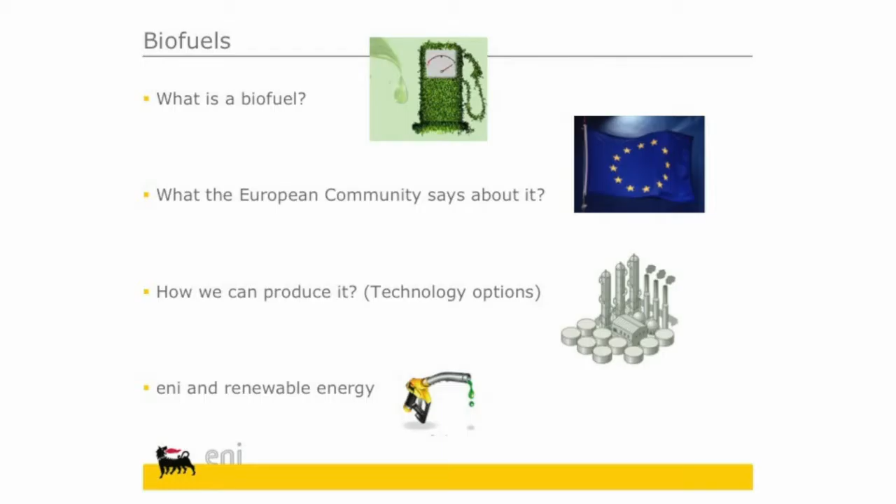Today I want to tell you something about biofuels. During this seminar we'll see what a biofuel is, what the European community says about biofuels, how we can produce them and eni involvement on biofuels. What is a biofuel? A biofuel is a fuel that is derived from biological materials. During this presentation, we will understand which kind of materials.

But first, I want to show something about the carbon balance of biofuels. In particular, all fuels, fossil and bio, emit some carbon dioxide during the combustion phase in the engine. But for biofuels, this CO2, carbon dioxide, is first fixed during the growth of the biomass. So we have a minor impact on CO2 emissions for biofuels compared to fossil fuels.

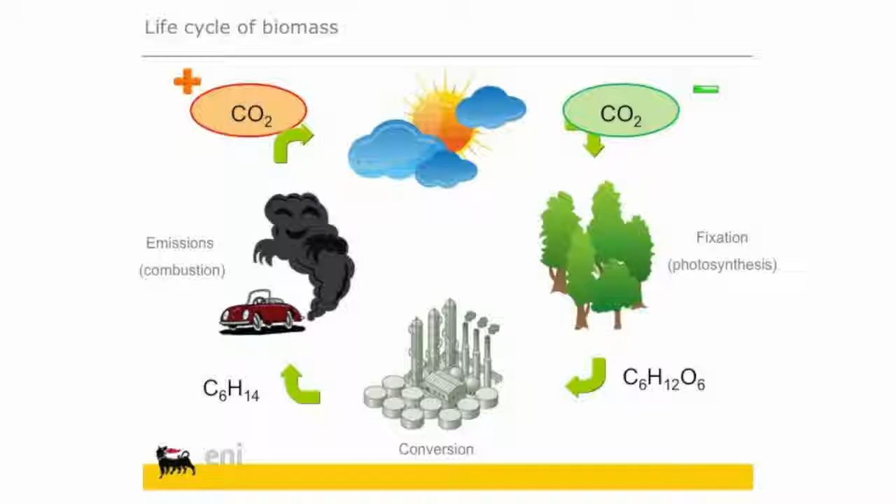What does the European community say about it? In order to reduce CO2 emissions, the European community indicates a quantity for biofuels. In particular, there is a directive, the Renewable Energy Directive, that fixes 10% of energy in the transport sector for 2020 from biofuels and electricity and hydrogen produced from renewables. Moreover, the RED also suggests a percentage of advanced biofuel.

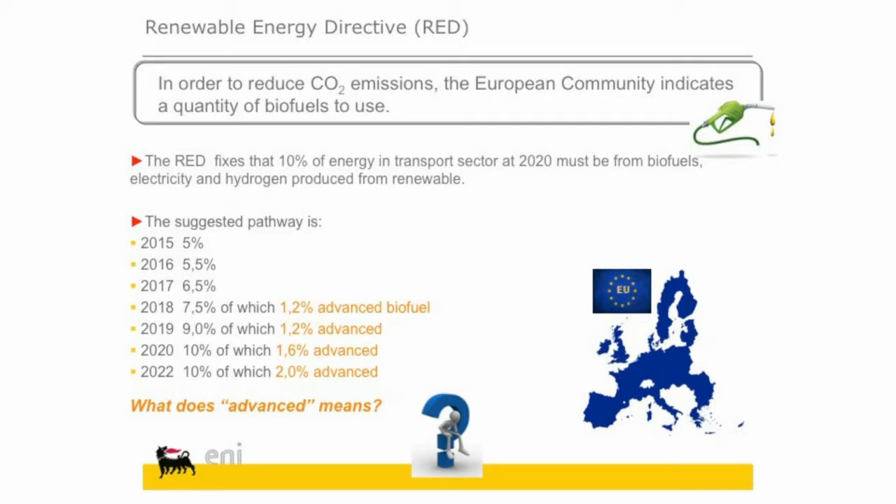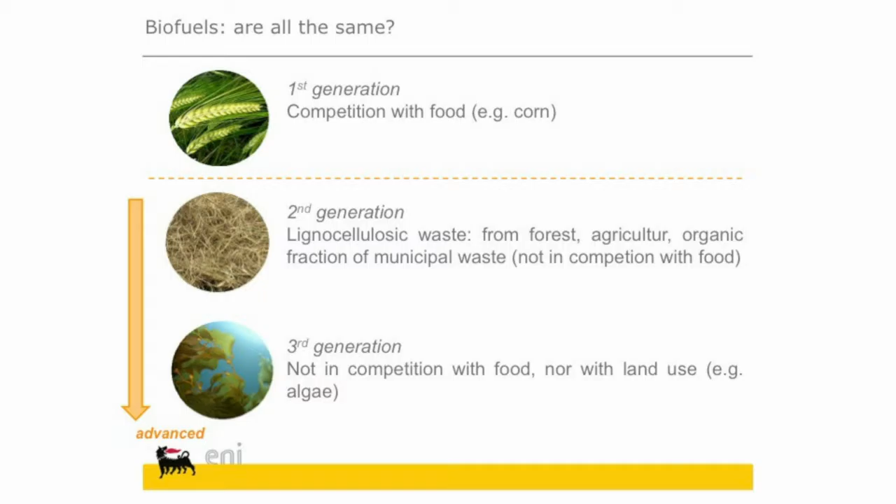What is an advanced biofuel? We can see in the slide. Are biofuels all the same? This is the question, but the answer is no, because we can define three different generations of biofuels. In particular, the first generation, when the biomass for producing biofuel is in competition with food. The second generation is from lignocellulosic biomass, so we have no competition with food. But moreover, the third generation is when there is no competition for food, but also for land use. For example, for algae, we can cultivate algae in the sea or in other areas not suitable for other cultivations.

But first, I want to show you the actual situation of biofuels. We can see the production now of biofuels in the world, and we can also see that they are mostly of first generation, in particular from palm, from rapeseed, from sugarcane, and from corn.

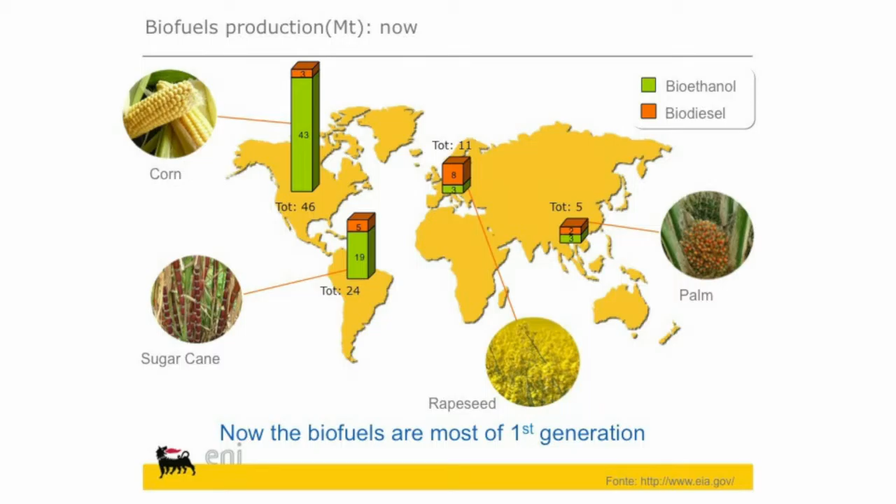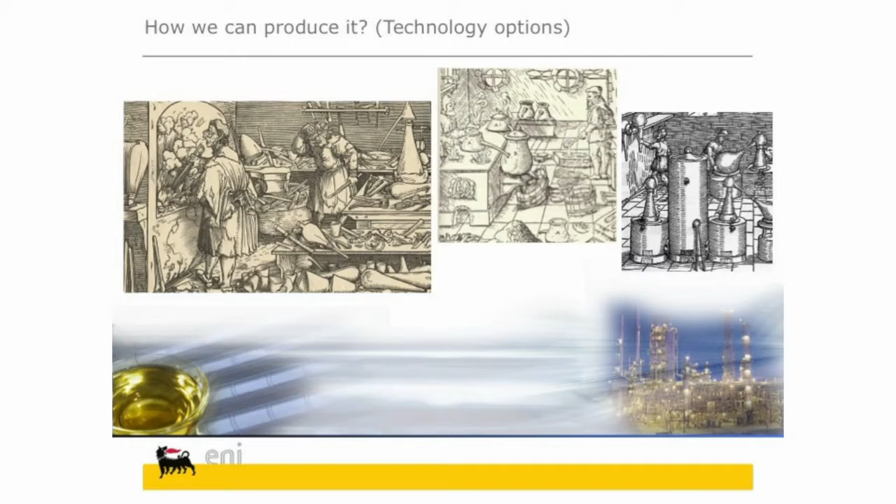Now, we can see how we can produce a biofuel. So we have some different technological options. A big distinction is between biochemical conversion and thermochemical conversion. Under biochemical conversion, we can see fermentation, digestion, and photosynthesis. For thermochemical conversion, we have pyrolysis, liquefaction, gasification, and hydrotreating.

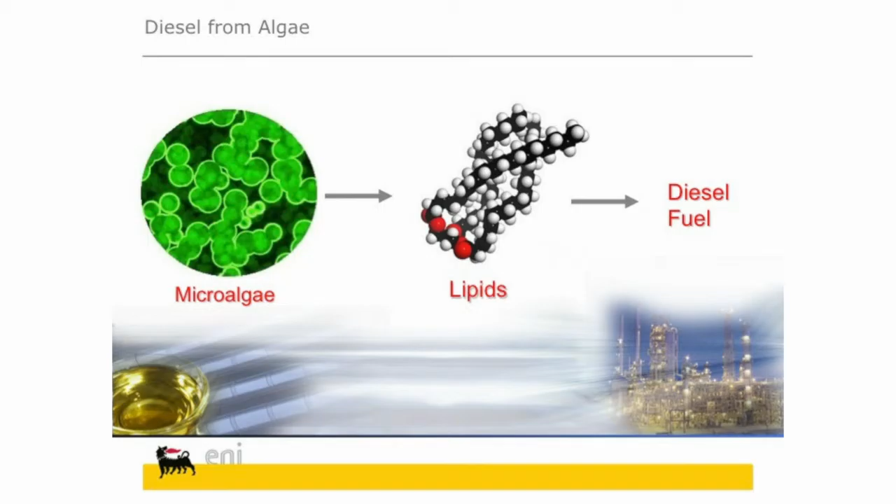Before seeing the way to produce biofuel, we can mention the most famous biofuels. We have bioethanol, biodiesel or FAME, hydrotreated vegetable oil, HVO, biomethane, pyrolysis bio-oil, and biomass to liquid. Now we start from bioethanol. To produce bioethanol, we need sugars, and in general in this presentation you can see the molecules with carbon atoms in gray, hydrogen in white, and oxygen in red. The sugar for bioethanol derives from biomass.

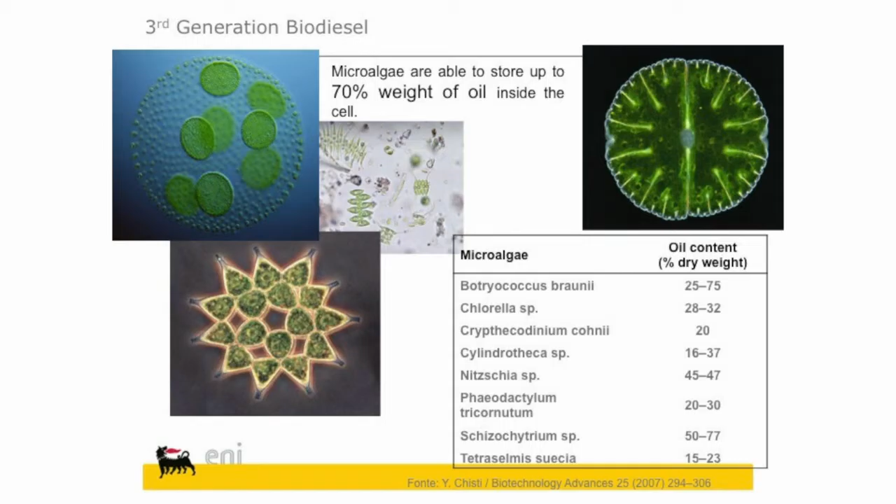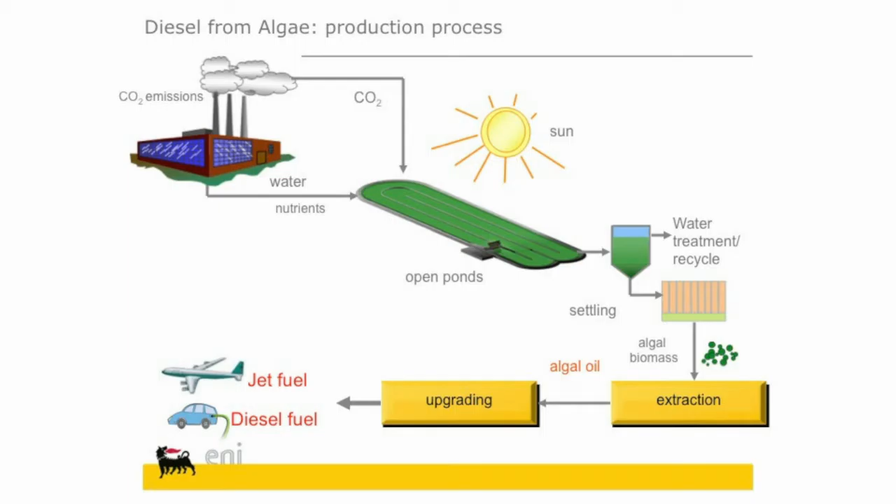The process for producing ethanol from corn is quite similar to the production from sugarcane, but we have one more step, the saccharification step with enzymes. We need this step to make the sugar available for the fermentation.

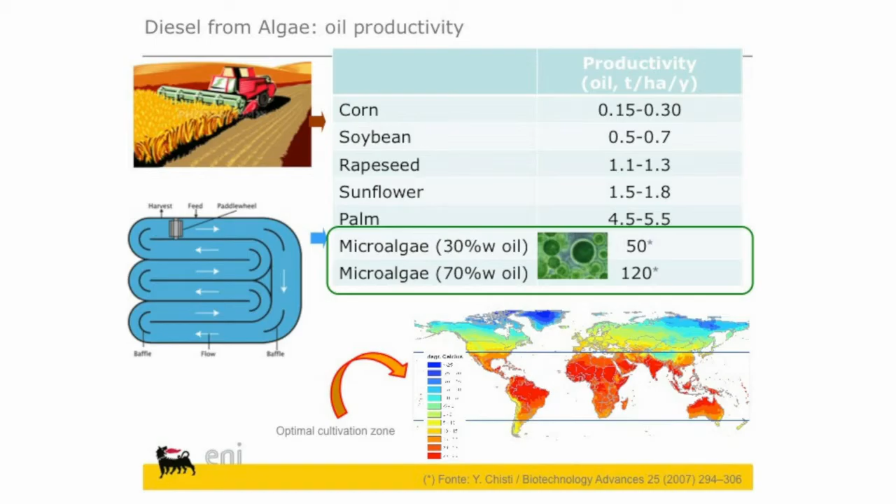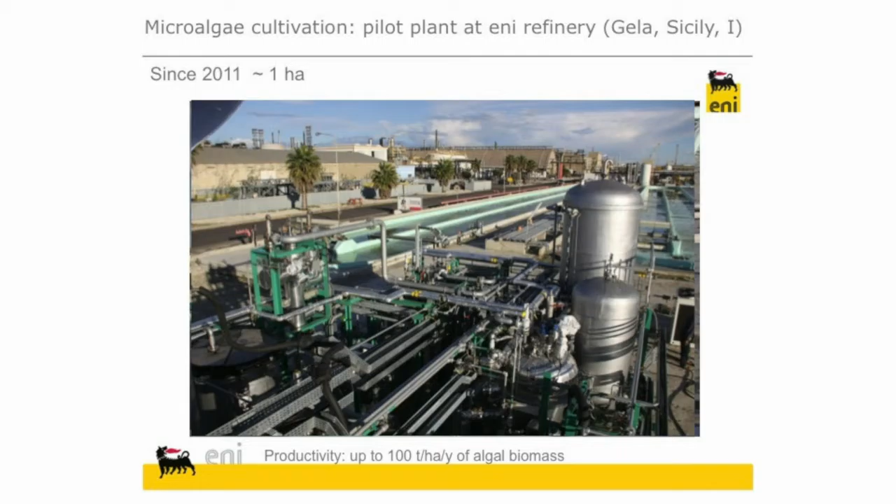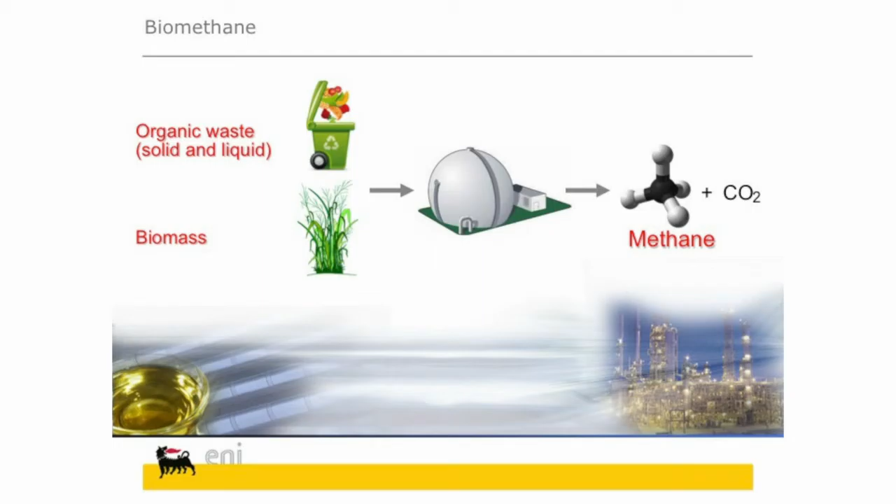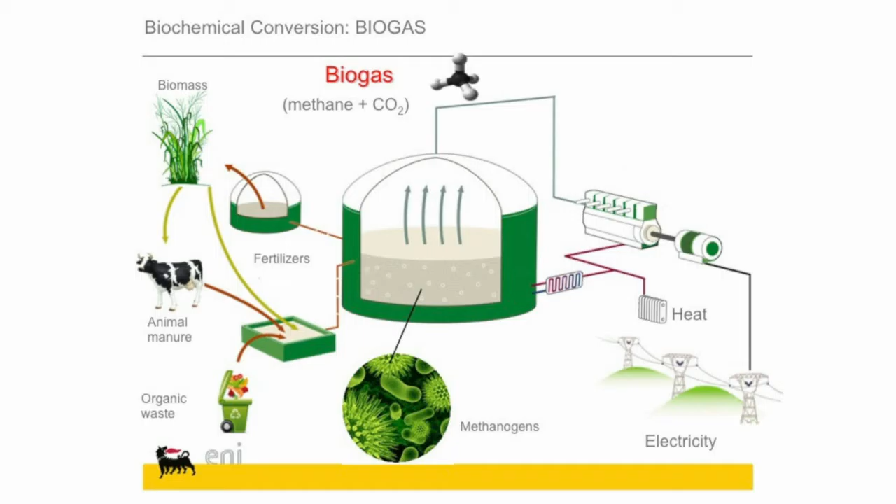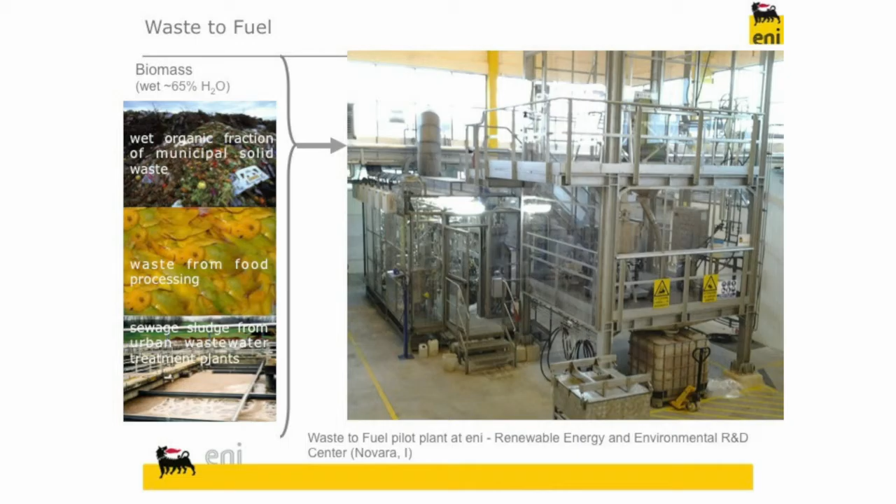Another possible biofuel is biodiesel or fatty acid methyl ester. Fatty acid methyl ester is produced from triglycerides. These triglycerides are obtained with a process of oil extraction from biomass. We can use different kinds of biomass, for example, sunflower, rapeseed, and palm, so palm oil. And the oil is subjected to a process of transesterification and purification. So we obtain the fatty acid methyl ester and glycerol as a coproduct.